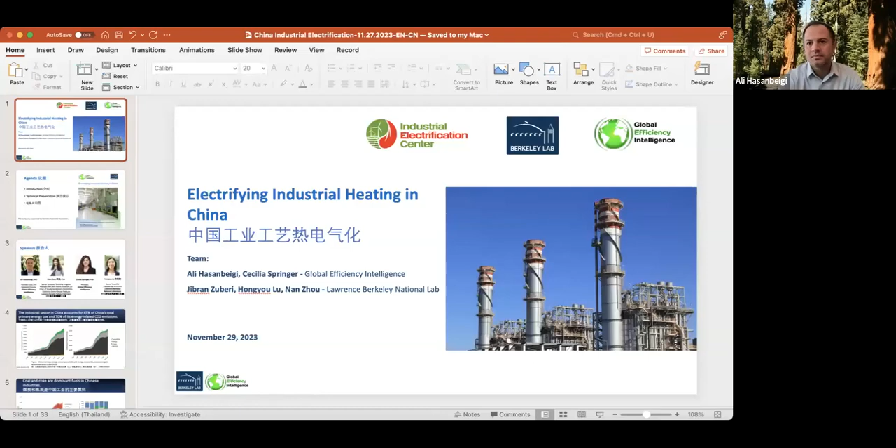Perfect. So if you are here for electrifying industrial heating in China, you are at the right place. As I mentioned, this was a collaborative project with Lawrence Berkeley National Lab. The team members are listed here: Jibran Zuberi, Hongyu Lu, Nan Zhou, and myself and Cecilia Springer from Global Efficiency Intelligence. We have been working together for many years. Even before Global Efficiency Intelligence, I was working at Lawrence Berkeley Lab, so it's a team that has worked together for many years. We are gonna give a very brief introduction, then we will have technical presentation and then the Q&A.

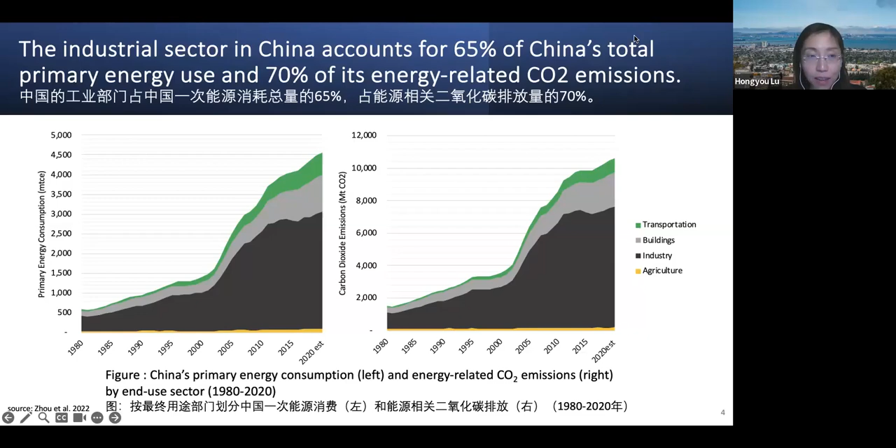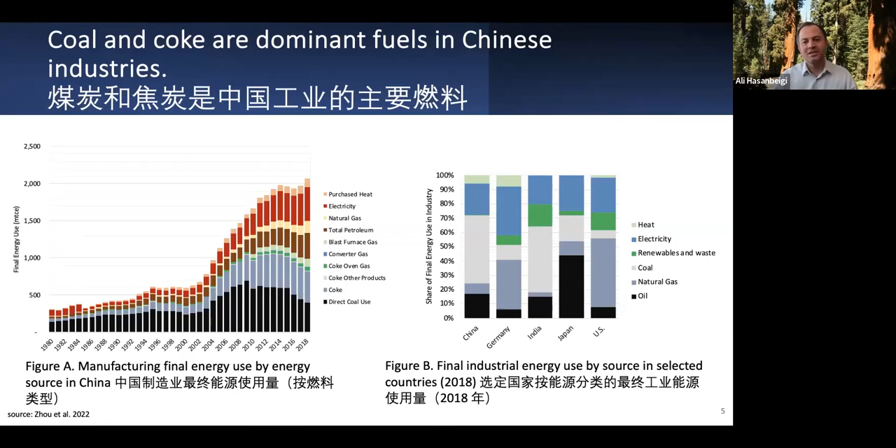Thank you, Hongyu. This is important to highlight: lots of coal, fossil fuel, we want to transition away from it, shift to electricity, but of course, renewable electricity. That's the whole point here. So before jumping into electrification, I wanted to step back and show the bigger picture.

Third is electrification of industrial heating, the topic of today's conversation. Fourth is what we call low carbon fuel, feedstock, energy sources. For example, green hydrogen falls there, sustainable biomass falls there, low carbon feedstock, biofeedstock falls there, or low carbon feedstock in terms of green hydrogen for DRI iron making, and things like that. And then the last one is CCUS, carbon capture, utilization, and storage.

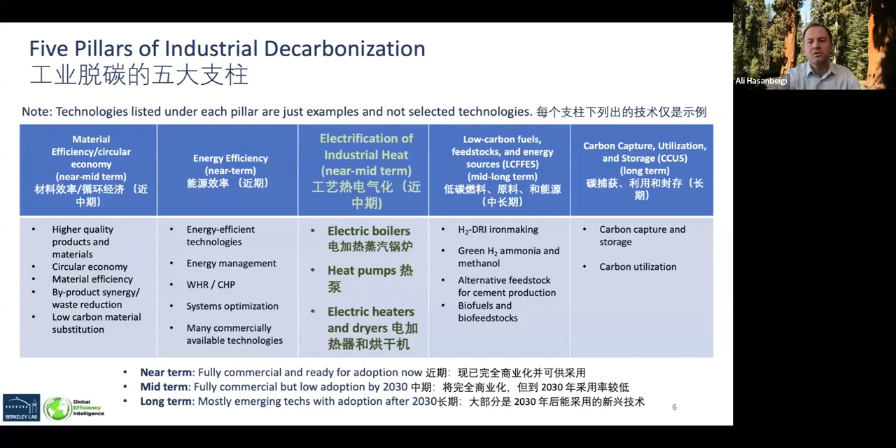So what we want to highlight here: today we talk about electrification, but we should not lose sight of all these other pillars that all need to go in parallel, hand in hand. In certain sectors some of the pillars play a more important role, and in some other sector some other pillar, but all these pillars need to be followed if we want to get to net zero industry. But today we talk about the electrification pillar for industrial heating.

For China, we did a study and published last year for the textile industry. We did a study on electrification of heating in the textile industry in China, Japan, and Taiwan. That is why the textile industry was not included in the report we published today, because it was extensively studied and presented in the other report. So if you are interested in the textile industry in China or overall, please look at the other report.

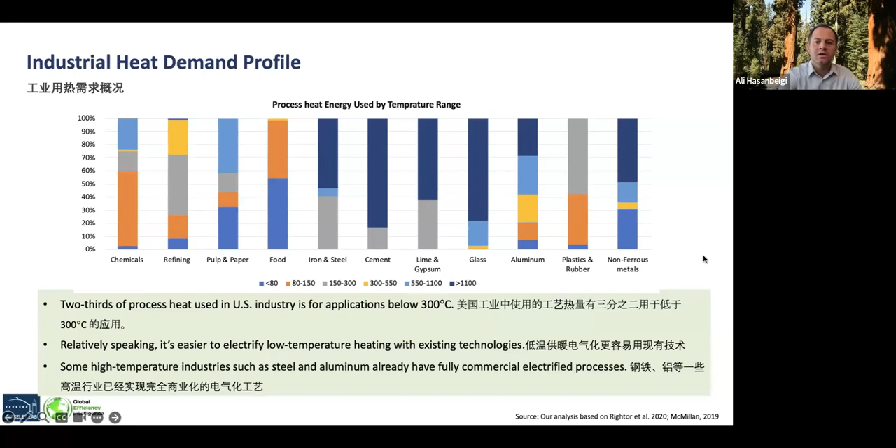Nevertheless, we do have some industries like the steel industry or aluminum industry that have high temperature, and we do have electrified technology. For steel it is the electric arc furnace, or even hydrogen DRI, which you can call indirect electrification, and primary aluminum making is electrolysis anyway. So that's something to keep in mind. The nature of electrification is different in different sectors.

When we talk about electrification, we have looked at it from two different angles. One way to electrify is you go to your boiler room, you don't touch your process, and you basically electrify your boiler. It's a commercial technology, has been around for decades, and we have analyzed it in detail for all the subsectors, and my colleague Cecilia is going to talk about it in a few minutes.

The other way is you go to your processes, you have dryers, heaters, kilns, furnaces, and you electrify those processes, given certain current processes that can be heated using electricity. For example, you have a dryer using steam or hot oil or even a direct fire system for heating or drying. You can buy a machine that does the same thing, but it uses electric coils and electricity for doing that.

And in many sectors, actually, those machines are available. You can buy them today. Some of them are emerging. So that's what we call electrification of end-use industrial processes. And we have done extensive analysis there also for this category.

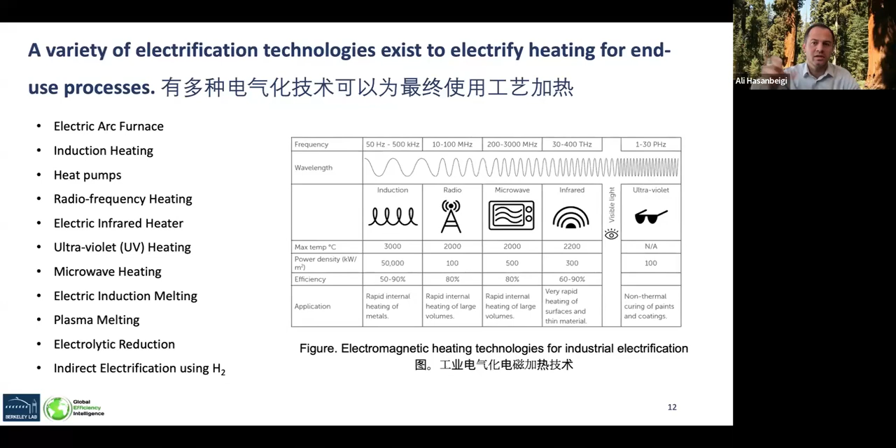And that is a strength, because industry is very complex. We have different processes, different subsectors. So we need a range of technologies that can provide that sweet spot for the heating for that particular process, if we want to electrify the end-use processes, not just the boiler.

We identified some of the main processes in these sectors, and we analyzed how the heat is used, the temperature profile, the nature of the heating service, and then we identified suitable electrification technology for that process, or several main processes. And based on that, we did the assessment of the integration of these electrified processes into the system. And then from there, we did the calculation for the energy saving, CO2, and cost. So that was basically our analysis process.

For the CO2 emissions assessment, we developed two scenarios, primarily based on the electricity emissions factor, because we did projections up to 2050. So it's important to see where the electricity emission factor is going. China, as you all know, currently has a very high emissions factor for electricity generation. And that's one of the reasons people say, oh, we should not electrify. And that is actually not true.

So for the baseline scenario, we assume that electricity emissions will go to zero in 2060. And that is in line with China's national target of carbon neutrality by 2060. So that, to be honest, is a conservative scenario.

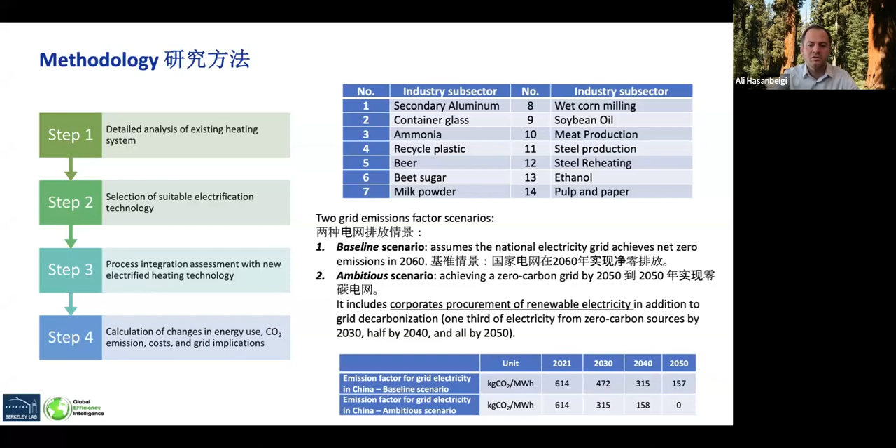We assume around 1/3 comes from corporates buying renewables through PPAs in 2030, around half in 2040, and then by 2050, through the mix of grid and corporate PPAs, individual companies can get to zero carbon electricity. So that's a more ambitious scenario, just to show how this will impact the results of electrification in terms of CO2 emissions. The numbers are presented there in the table.

So we have done this analysis, as I said, for 14 sectors, but I don't have time to talk about all of those. Actually, I'm realizing time is going really fast. So just one example: secondary aluminum production. To produce secondary aluminum, usually there are furnaces that use fossil fuel. Other parts of the world use natural gas. In China, they also use coal to do the heating and melting of the aluminum scrap to produce aluminum. You can use induction furnaces, different types of induction furnaces.

In this case, we use single shot induction furnace to basically do the same thing. There are pros and cons to both approaches. Some of the challenges with induction furnaces in terms of the size, more important, the electricity price, etc., are there. But the sizes are increasing, and technically speaking, there is no challenge really to go that direction. So it's a commercial technology to implement even today. Not to say that it will be cost effective, it will show the cost result, but it's technologically possible.

So if you do that, you can see from the table, in terms of energy intensity, kilowatt hour per ton of aluminum produced, the electrified process in final energy term will cut your energy by more than half. So that's significant reduction in energy intensity, because electricity, as you know, is higher grade energy. So it can really improve efficiency.

And then from there, we went to the national level, multiplied by production and some projections, and quantified what would be the overall change in energy use if we electrify secondary aluminum making in China. By the way, China is the largest aluminum producer in the world. And you can see we are talking about tens of petajoules per year. The aluminum production increases, that's why you can see a significant increase in saving. It's a change in energy use, that's why the negative value implies reduction.

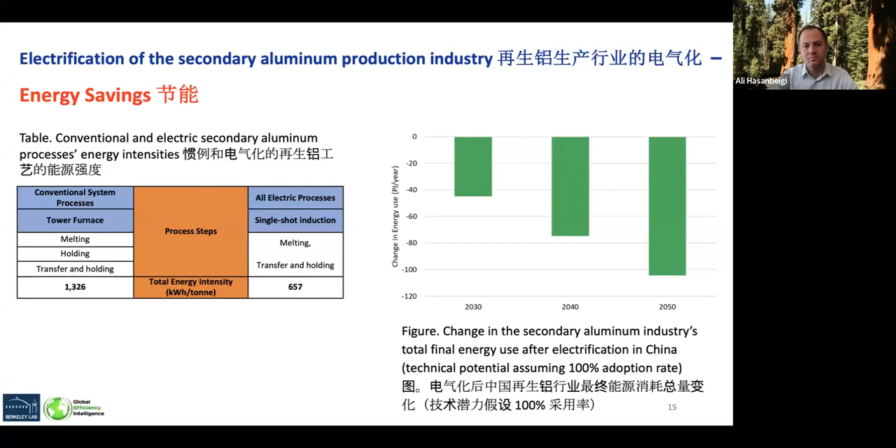Let's talk about CO2. CO2 is actually an interesting case depending on the industry. The graph on the left-hand side shows the change in CO2 emission from electrifying secondary aluminum making in China, also 100% adoption rate. The results are for 2030 up to 2050, and for two scenarios: base scenario that assumes grid goes to zero in 2060, and an ambitious scenario that assumes corporates start buying some PPA renewable and having clean electricity.

You can see even under baseline scenario, which is more conservative, as soon as 2030, we are getting reduction in CO2 emission by electrifying. So despite the common belief that China's grid is dirty now and will be dirty in 2030, in many sectors our analysis shows, you see in the report, that in 2030 we get emission reduction from electrification based on the trajectory of the grid emission factor I showed you.

And of course, if you go with ambitious scenario, you start putting more renewable through PPA, you definitely will get your emission reduction. And even better than that, even today, any aluminum production or any plant in China can electrify and just buy enough renewable electricity through PPA and get emission reduction, even today.

Keep in mind, you do not need to have zero carbon electricity for electrification to make sense or be carbon beneficial. You just need to have enough clean electricity in your mix to be below a certain threshold, depending on the technology you implement. And there you go, you will get your CO2 emission reduction.

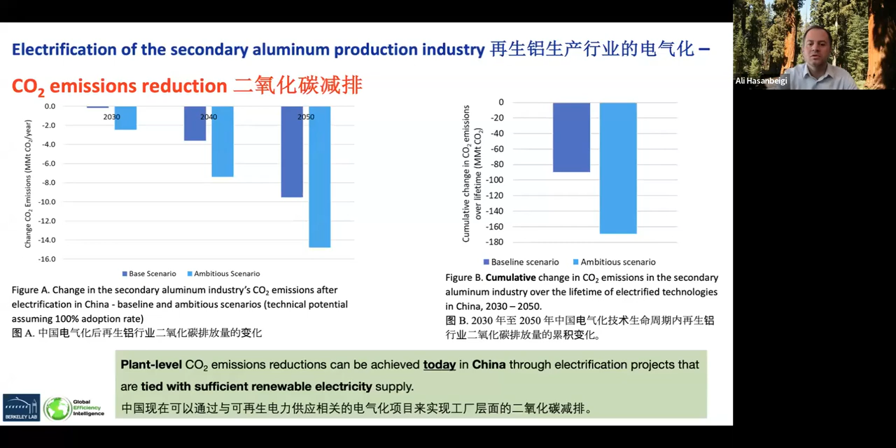So from the planning policy perspective, or even corporate planning perspective, you might even go with cases where in the beginning, for a few years, you might increase your emission. But if you go through the plan in terms of adding enough clean electricity, then you will be good to go to electrify and get the benefits over the lifetime of the technology.

On cost, we did the energy cost analysis for all this electrification. So this graph shows conventional process versus electrified process energy cost per unit of production, per ton of aluminum produced, in 2030 and 2050. Dark blue is carbon cost, light blue is fuel cost, and green is electricity cost. So it's very clear in 2030, if you electrify, the energy cost is going to be probably more than twice in electrified process compared to conventional.

That is basically the #1 barrier to electrification in many places, in many sectors, especially in places like the US, where we have cheap natural gas, which is a relatively cleaner fossil fuel. It's really not helping. In China, it's coal, of course, mostly.

But if you go into the future, if there is a sufficient carbon price, and given that the price of renewables might still drop, or it's not increasing as fast as the price of certain fossil fuels, then based on our projection, at least of energy price, electrified processes can get cost competitive in the future. So that's something to keep in mind.

One thing I want to highlight: when you go to an industrial plant, there's all this input to make the production, whether it's aluminum and all. In certain sectors, energy cost is a larger share of production cost, but in certain sectors it really is small, especially when you talk about lighter industry like food, textile, etc. There's labor cost, material cost, and energy cost often is less than 10% of the total production cost. So even a significant increase in energy costs will have minimal effect on the final production cost.

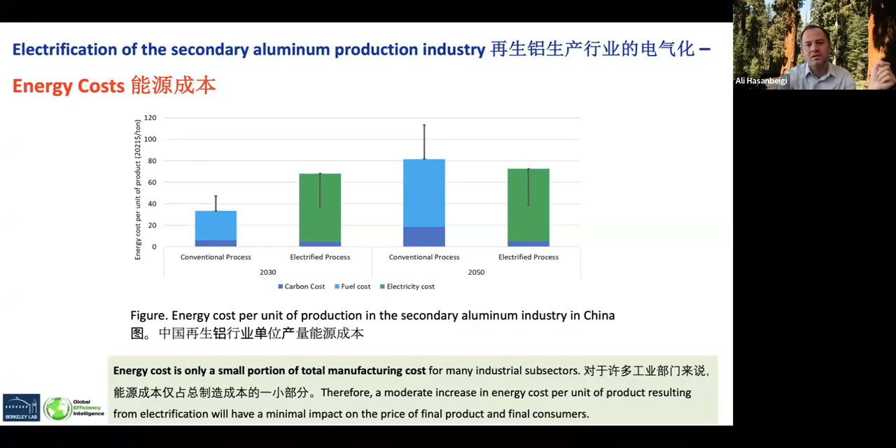So that's something to keep in mind when we are planning corporate deep decarbonization and what would be the impact on the cost. Just by doing electrification in these 14 sectors, as you know, industry has many other subsectors, we are talking about gigaton scale annual CO2 emission reduction, if we can manage to use, of course, complete 100% renewable electricity. And that's only the case under the ambitious scenario in 2050.

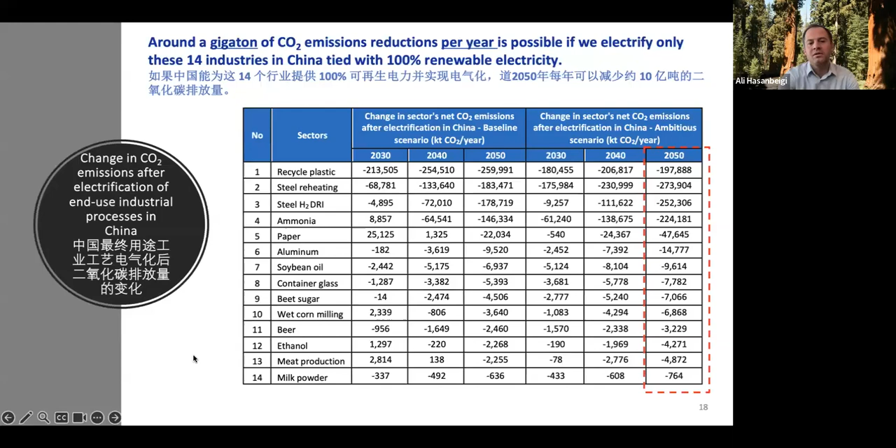That's why I've highlighted it. The 2050 ambitious scenario assumes zero carbon electricity. So if you want to see what happens if we electrify and use renewables, that's what happens. And if you sum them up, it's a gigaton scale per year. And of course, if you add all these other sectors, we are talking about significant CO2 reduction potential. So that was a very quick example of this subsector level end use process electrification.

And now my colleague Cecilia is going to tell you more about what happens if you go to the boiler room and electrify boilers in different sectors, and what are the results for that in China. Cecilia? Thanks, Ali. I'll be talking about our findings on transitioning to electric boilers, which we also analyzed in terms of the potential energy savings, emissions impacts, and cost implications.

So we know that one of the benefits of switching to electric steam boilers is that they have a higher efficiency of 98 to 99% compared to about 70 to 80% for the typical combustion steam boiler, depending on various variables such as their size, fuel type, condition, and so on. We also know that electric steam boilers have been commercialized and widely used for decades. However, even though they are more efficient and a mature technology, they still hold quite a small market share.

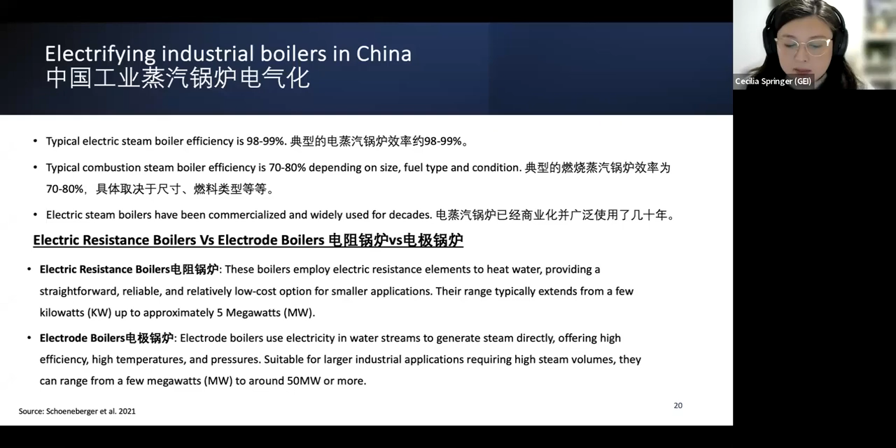The electric boilers that we're studying function either as electric resistance boilers, where an electrically heated element transfers heat to water, or as electrode boilers, where an electric current directly heats the water. And electric boilers offer various other advantages besides efficiency, like reduced air pollution, quicker ramp-up times, and so on. Next slide, please.

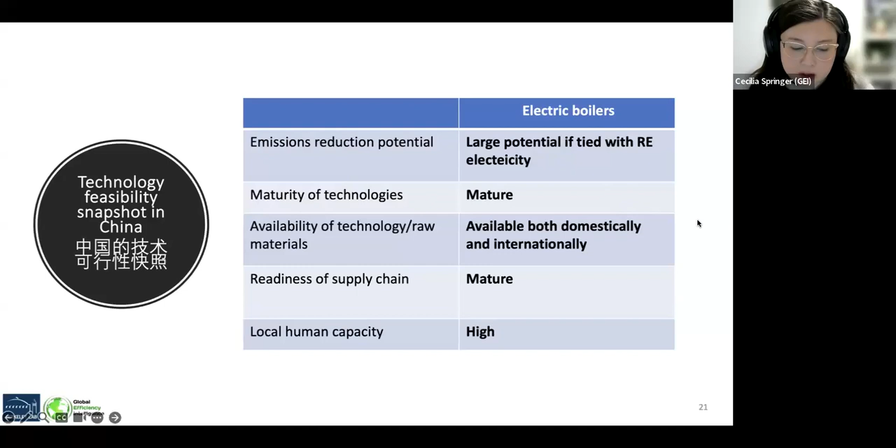And just to characterize the feasibility of the electric boiler technology in China at the moment, they do have a large emissions reduction potential, especially if paired with renewable electricity. It's a mature technology, as I mentioned. They're available domestically in China as well as around the world. The supply chain is also mature, and there is also a high readiness of local human capacity. Next page, please.

So in our analysis, we looked at energy savings from switching from combustion boilers to electric boilers. On the left, this graph compares the current energy demand in combustion boilers and the potential electricity use if boilers are electrified in Chinese industry in the base year of our analysis, 2022, showing that electric boilers can reduce the boiler on-site energy demand by 28% across the sectors studied.

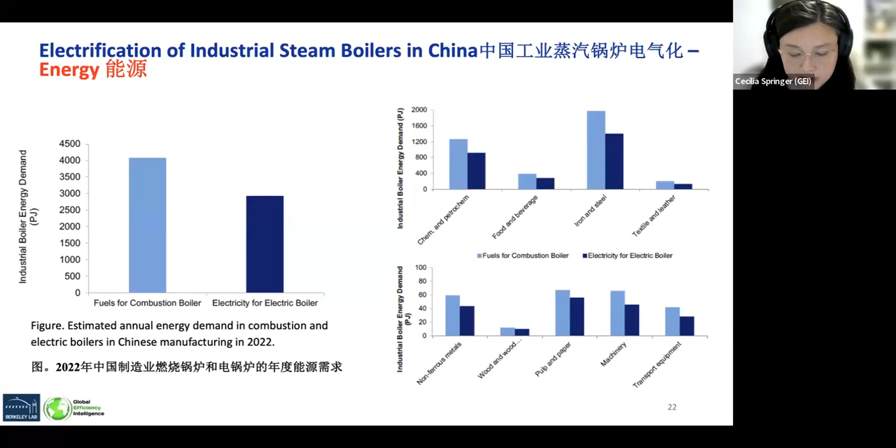And on the right, we have a breakdown by sector of energy savings. The top graph is the 4 most energy intensive industrial subsectors in China, while the bottom graph shows the remaining subsectors that we analyzed. And just to note, these are a slightly different group of subsectors than for the prior end-use electrification analysis, based on data availability. Next slide, please.

So talking about emissions, I think as Ali mentioned earlier, because of the carbon intensity of China's grid, in certain sectors there may be a sort of near-term increase in CO2 emissions from electrification. And this could be around 28 million tons of CO2 from the base year to 2030 in our baseline scenario. However, in our ambitious scenario, which projects increased procurement of renewable electricity and a faster achievement of net zero electricity, the annual change in emissions is negative in 2030, with further reductions in emissions over the study time period.

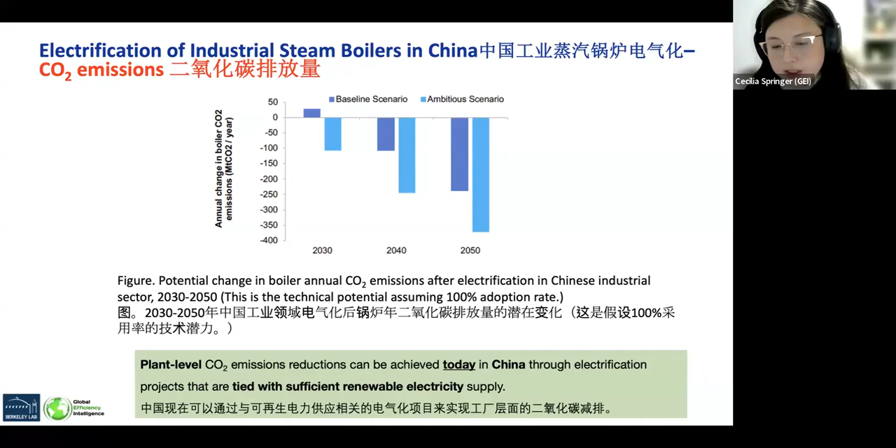So, comparing across scenarios, boiler electrification is projected to result in 237 to 372 million tons of CO2 emissions reductions per year by 2050 between the 2 scenarios. So just to underscore what Ali mentioned earlier, that doesn't mean don't electrify in the near term, because plant level emissions reductions can be achieved today when electrification projects are tied with sufficient renewable energy supply. Next slide, please.

So we also break down emissions by subsector and the potential change over time. The top row of graphs shows the 4 most energy intensive subsectors in China. The bottom row shows the remaining that we analyzed. On the left, we have results from our baseline scenario, and on the right for our ambitious scenario with more rapid grid decarbonization and renewable energy supply.

And so you can see that for some sectors there is a near-term increase, but especially for the most energy intensive subsectors, the annual emissions reductions could reach, for example, 167 million tons of CO2 in chemicals and 133 million tons of CO2 in steel under the ambitious scenario. Next slide, please.

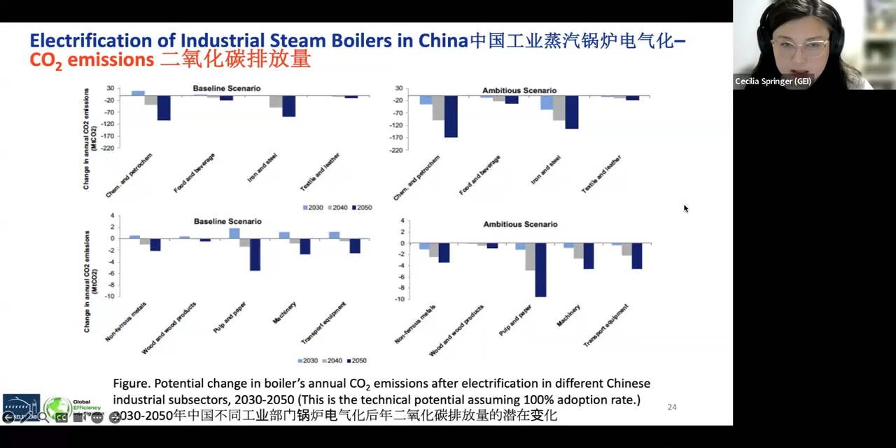So we also looked at costs, and this graph is comparing 2030 and 2050 for combustion boilers and electrified boilers. We can see that in 2030, the energy cost per ton of steam production for the electrified boiler process is quite a bit higher, almost 3 times higher than for combustion boilers. However, especially taking into account China's emissions trading system, which will be scaled up to cover various industrial sectors in the next few years, by 2050 the energy cost per ton of steam production is only about 15% higher for the electrified process under our ambitious scenario.

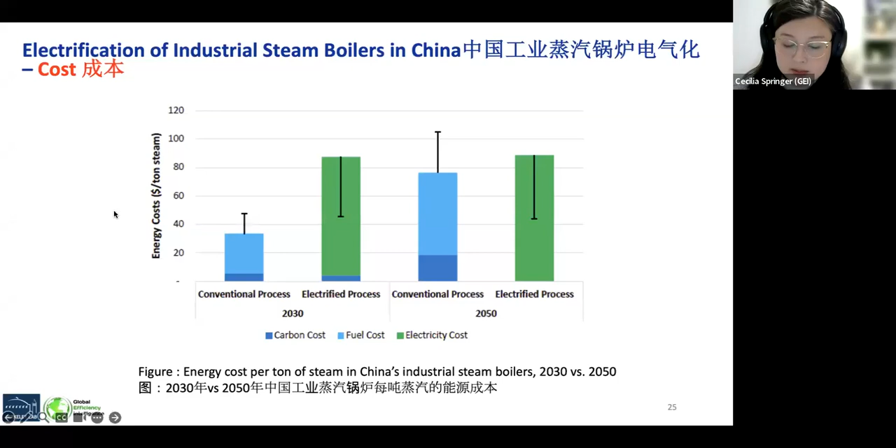And so, of course, the availability of lower cost electricity would reduce this cost differential. We've shown in error bars what it would look like with a 50% lower electricity price, for example. And this would easily bring the electrified process in line with the conventional process per ton of steam by 2050, especially if projected fuel costs also increase. Next slide, please.

So we also look at these costs and break them down by the different sectors that we analyzed. And it's clear that for some sectors, the electrification process will be relatively less costly in terms of cost per ton of steam by 2050. This graph is showing what the cost comparison would be in 2050, especially when taking into account carbon costs. And again, lower electricity price would change this ratio, higher fuel costs, and so on.

Some of the sectors with more favorable break-even points, so to speak, would be machinery, transport equipment, and here for boilers, we did look at the textile sector. However, we didn't consider capital or operation and maintenance costs for boilers, but it's important to note that in general, electric boilers are less expensive than conventional fuel-fired boilers in those respects. So next slide, please.

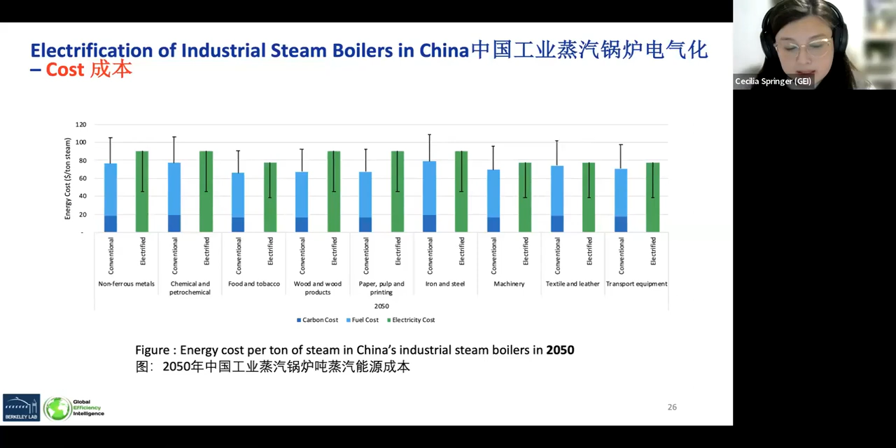So we also wanted to talk about the impact on the electricity grid of industrial electrification. Of course, this is critical in terms of the increased demand that electrification might put on the grid, as well as determining its overall impact on decarbonization based on the carbon intensity of the grid. So next slide, please.

China also released a 14th five-year plan for renewable energy last year, setting a target to reach 18% non-hydro renewable electricity generation by 2025, and to reach 1,200 gigawatts of installed wind and solar capacity by 2030, but it's already on track to meet this target 5 years ahead of schedule.

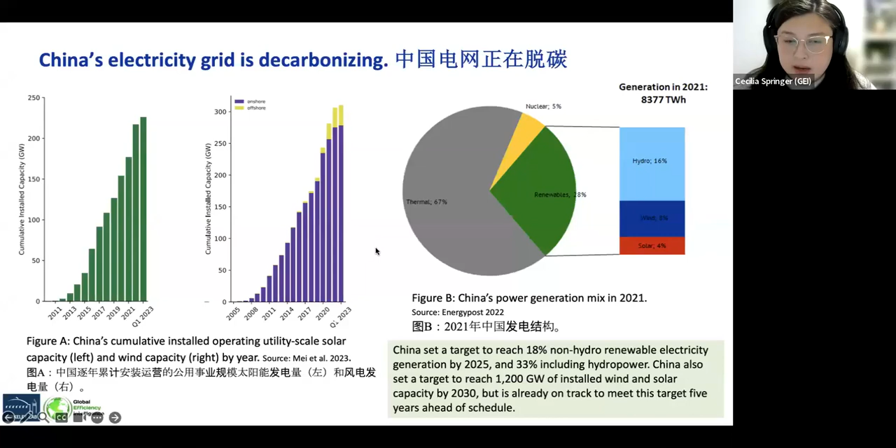We also summed up the additional load that would be needed to meet the needs of the electrification processes studied in our report. And so, while electrification results in a reduction in total annual final energy use across the sectors we studied, due to higher efficiency, it does lead to a higher demand for electricity. And so this figure shows that electrifying the industries that we studied results in an increase in annual electricity load. It was quite low in most sectors, but paper and iron and steel do have a significant additional load.

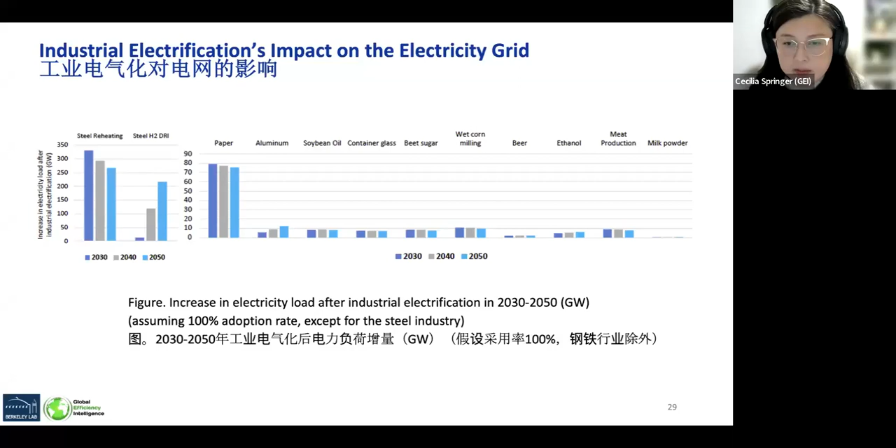So to fully electrify all of these industries, an additional 620 gigawatts of power generation capacity would be needed by 2050. And for comparison, China will be adding dozens of gigawatts of renewable energy capacity per year over the next few years, eventually aiming to add over 100 gigawatts of renewable energy capacity per year to reach that target. So it's important to note that demand is growing, but so is supply. And I will turn it back to Ali to talk about some of our study conclusions.

Thank you, Cecilia. I think this graph on electricity and the remark Cecilia just gave matter, because when we talk about electrification in China, everybody says, oh, the grid is dirty. Yes, it is, but it's decarbonizing rapidly. The scale of demand will be high, but the scale of supply is also significant. Like, 1,200 gigawatts of renewables is equal to the entire power generation in the US. And that's only renewables in China. And they're achieving that by 2025, I think. The target was 2030. So significant clean electricity supply is coming.

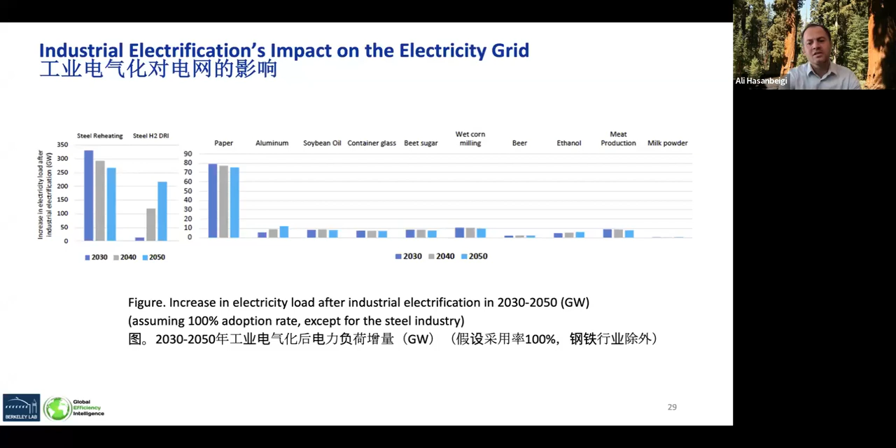So it looks like capital cost is the big one. Technology maturity, availability, renewable electricity supply, grid capacity, stability. These are some of the top ones that are standing out, which is very interesting, and it's all true. Although on the cost side, especially for boilers, as Cecilia said, usually electric boilers are actually cheaper than conventional boilers. Another thing to keep in mind, 95% of a boiler's lifetime cost is energy cost.

So if you're a corporate that wants to decarbonize your supply chain in China, or making policy, sometimes you should not look into capital cost. You should look at operational and energy cost and try to come up with innovative financing schemes that help with the operational cost, which is mainly energy cost, because electricity is significantly more expensive than coal or natural gas in many places in the world, including in China. And that has become the #1 barrier.

We are dealing with that as we speak. We are working with some corporates. They're trying to decarbonize their supply chain in Asia, primarily the textile industry. And it's not really the capital cost problem, it's the energy cost problem. So that's something to keep in mind.